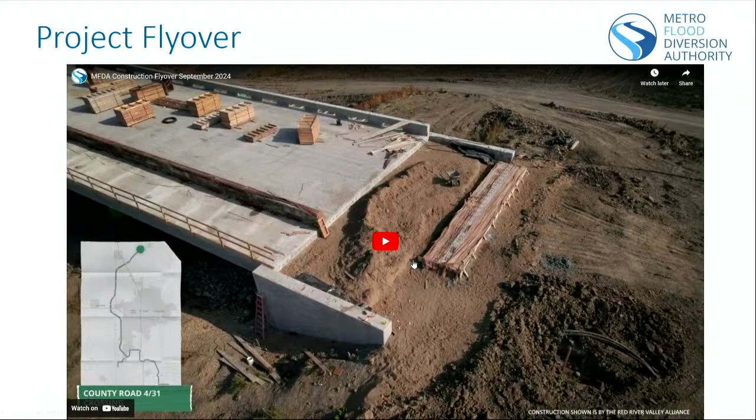One of the items we do on a monthly basis for our board presentation is a quick drone video update that gives a few-minute overview of the highlights of construction for the last month. Mayor, I hope you don't mind, but this is actually the presentation we'll show you guys tomorrow at our board meeting, so it's hot off the presses. This will be the first viewing of our drone update for September, giving a snapshot of some of the construction that's happened in the last month.

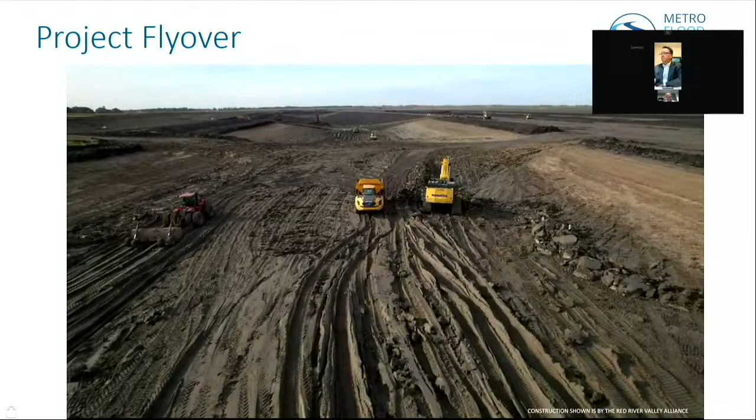Hi, I'm Tom Fuchs, the Senior Construction Manager for the Metro Flood Diversion Authority, with this month's project update. ASN Constructors' teams have continued to dig down to excavate the stormwater diversion channel while building up to construct the bridges that will cross over it.

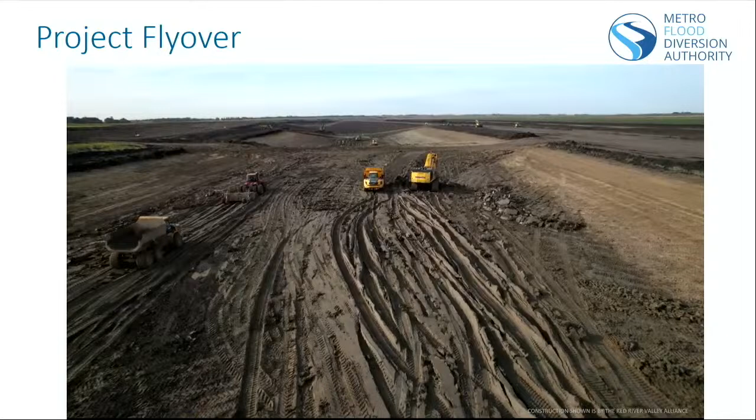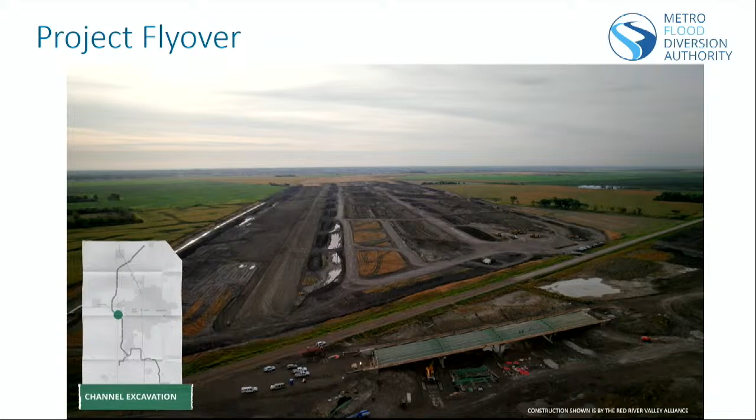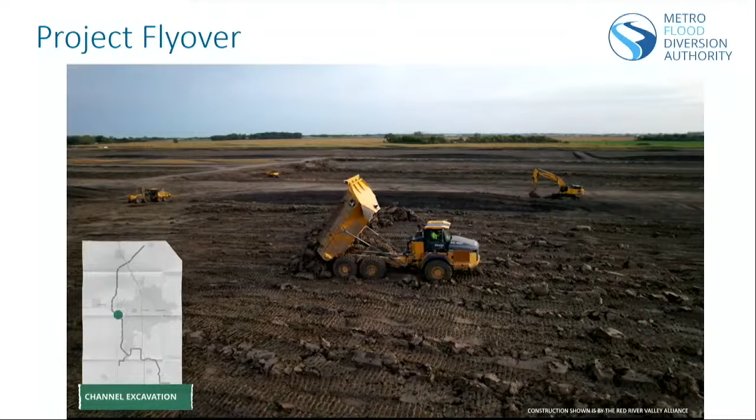In Reach 10, just south of I-94, crews are placing excavated material for the non-embedded levee, which must be constructed in warmer weather. Levee construction is also the focus in Reaches 11 and 12, further south.

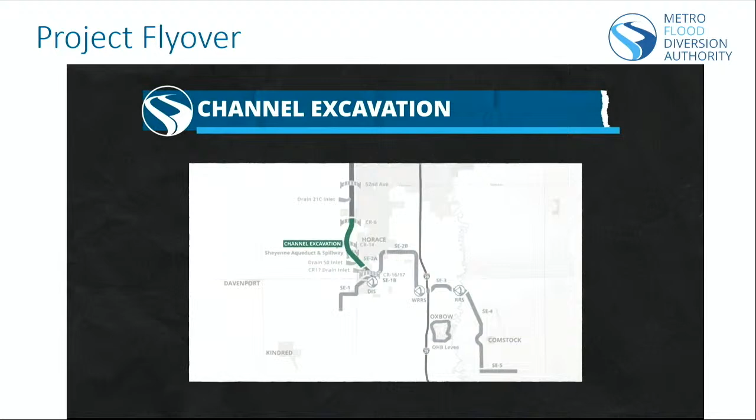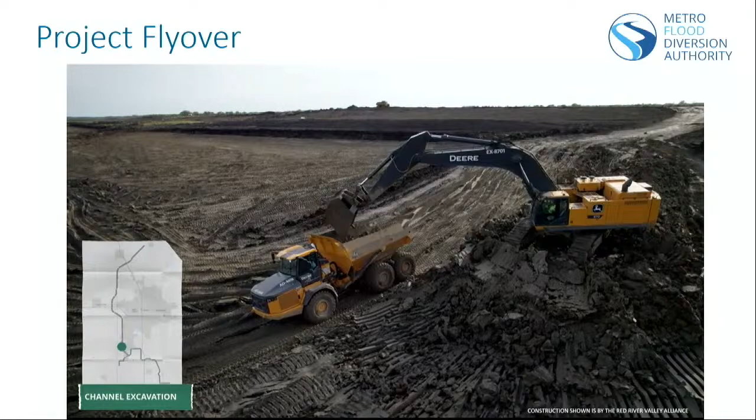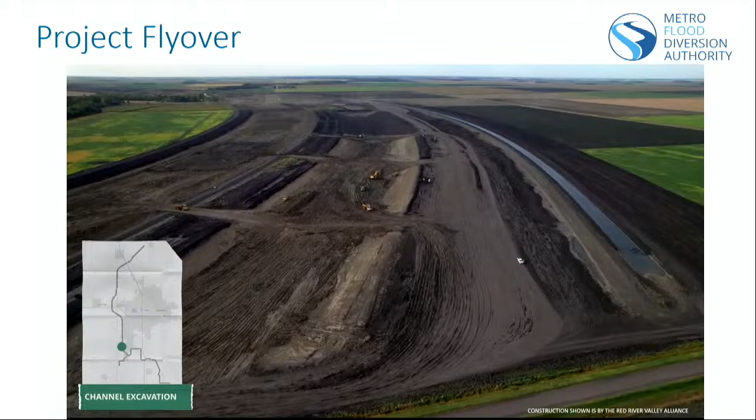In Reach 13 of the channel, south and west of Horace, North Dakota, crews are digging the main channel and placing the excavated material in berms on both sides. Close to another 2 million cubic yards of the necessary 45 million were moved in the past month, bringing channel excavation to about 57% completion.

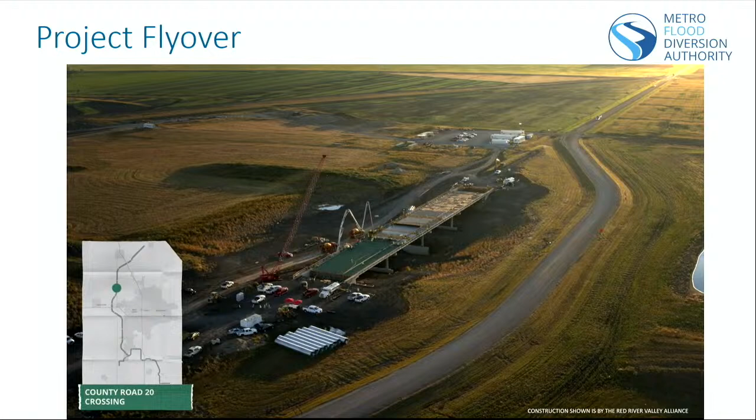Work also continues on many of the 19 channel crossings. At County Road 20, ASN Constructors started early to pour approximately 700 cubic yards of concrete needed for the bridge deck.

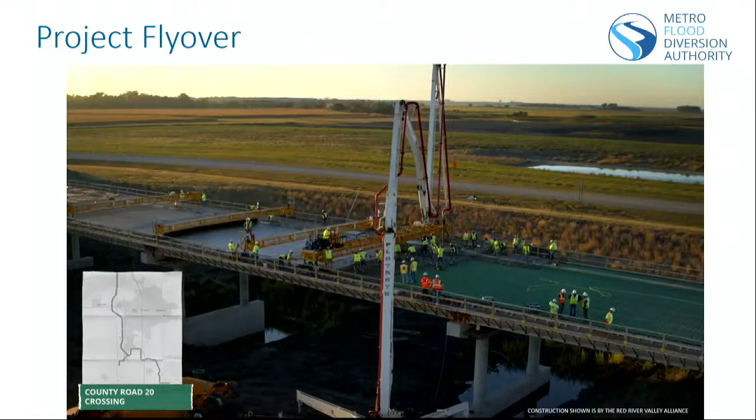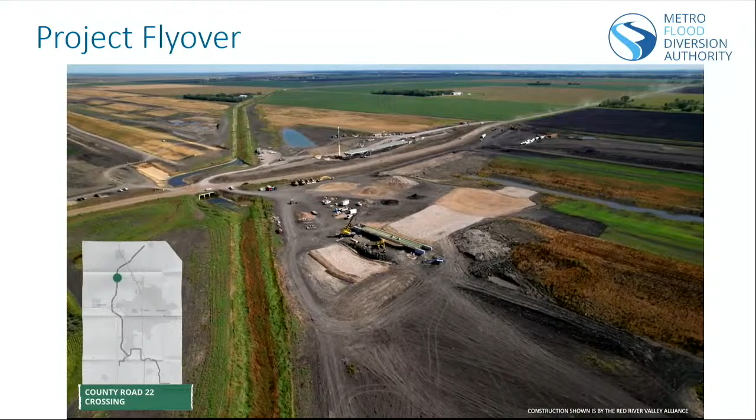North of there, at the County Road 22 crossing, bridge girders are now installed. Our drone view also captures nearby progress on the Maintenance Road Bridge crossing the lower Rush River inlet to the channel, which is one of several river and drain inlets under construction.

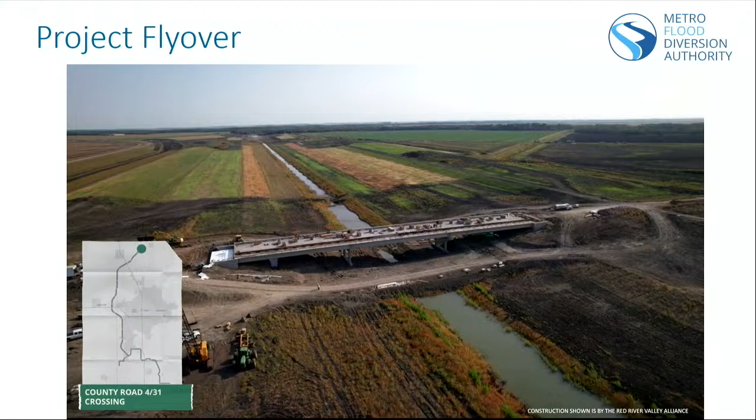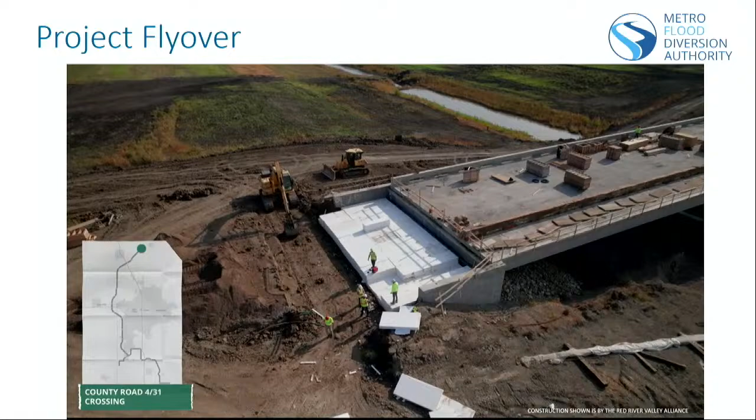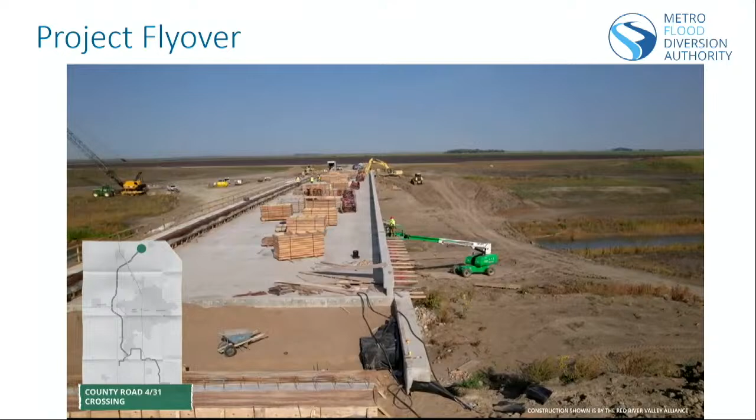Northeast of Argusville, North Dakota, near the diversion outlet, ASN Constructors is working toward completion of the combined County Road 4 and 31 crossing. Crews have now backfilled both abutments, including installing geofoam, a lightweight fill material that mitigates settlement, and they are beginning to construct the concrete approach slabs. Concrete bridge railings are also underway atop the bridge deck, which was placed last month. The new crossing is expected to open to traffic later this fall.

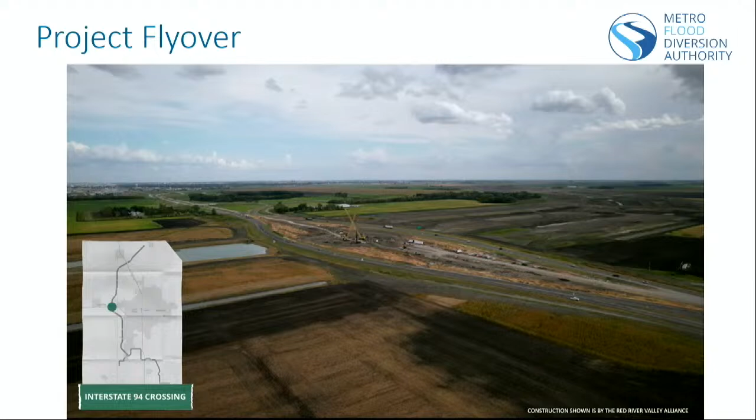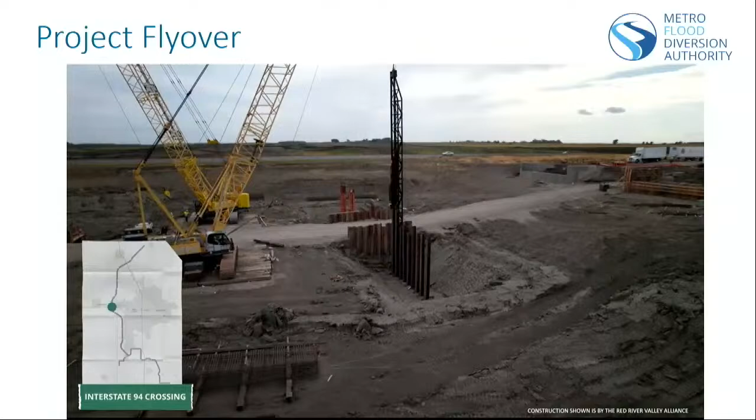West of the metro area on I-94, bypass lanes are now fully constructed and will be ready to open before winter. ASN has completed mainline pavement removal and constructed portions of the required grade raises for the new crossings. Crews also began driving H-piles as well as forming and placing concrete for the bridge's substructure elements this month.

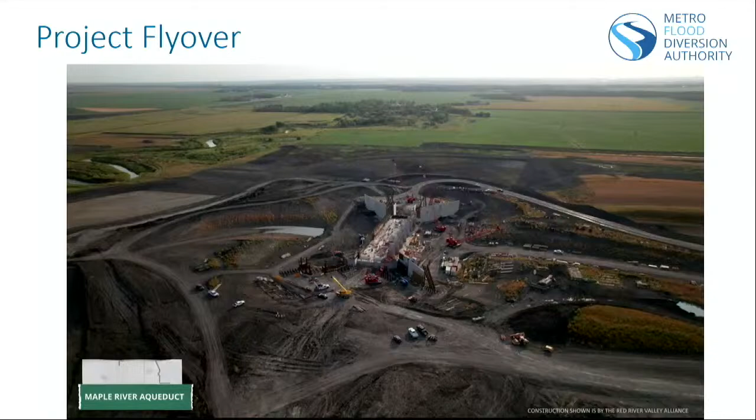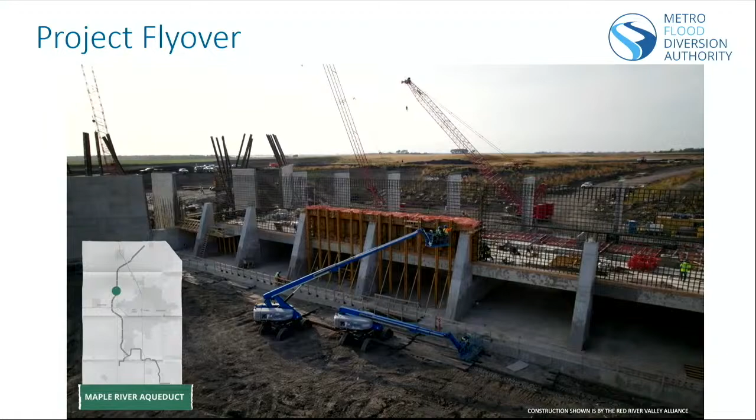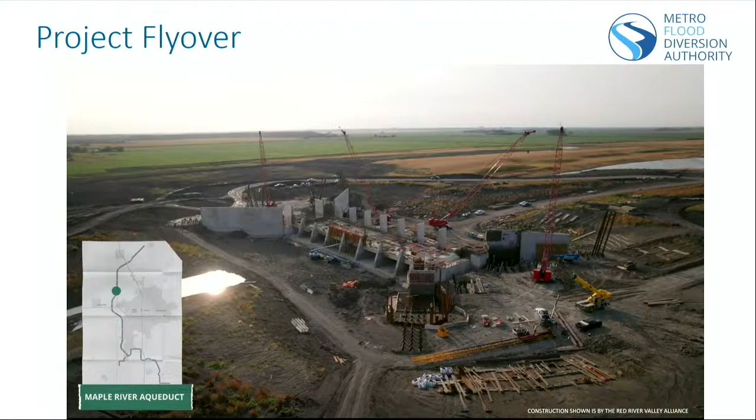Over at the Maple River Aqueduct, where the river, rather than cars, will cross over the channel, ASN has continued constructing segments of the concrete flume base and has begun formwork and concrete placement for the first portion of the north flume wall. H-pile installation and concrete work has continued at the adjacent wing walls surrounding the flume and conduit structure as well. To date, about 9,500 cubic yards of concrete have been placed at the aqueduct.

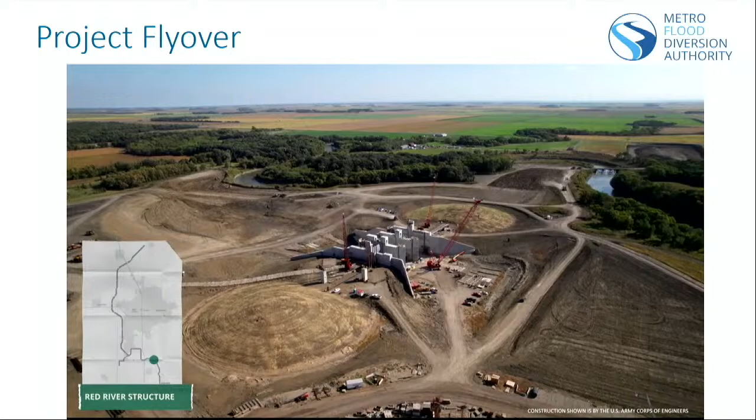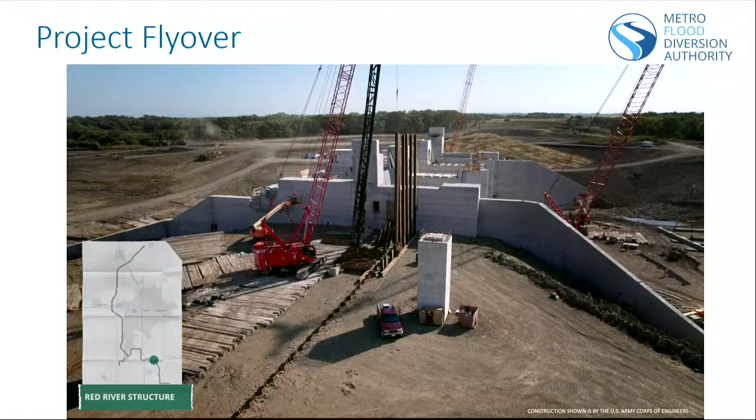At the Red River structure, Ames Construction is nearing completion of concrete work for the control structure. The U.S. Army Corps of Engineers contractor also began driving sheet piles and H-piles as well as placing concrete at the flood walls east and west of the structure.

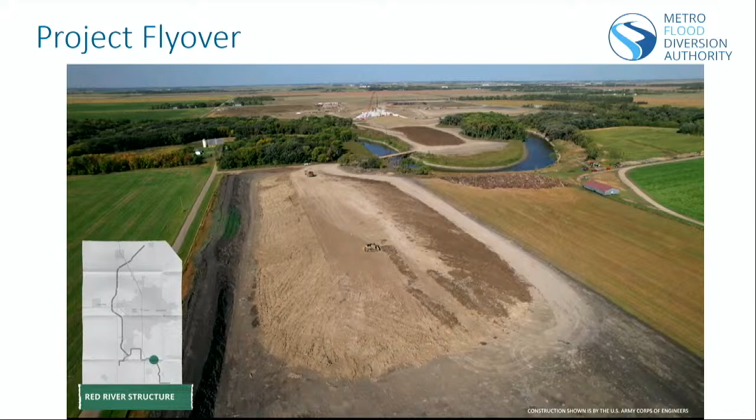Crews also began excavating and stockpiling roughly 460,000 cubic yards of impervious fill east of the Red River on the Minnesota side of the project. This material, enough to fill the U.S. Capitol dome more than 9 times, will be used to construct the embankment that will cross the Red River after the river is permanently diverted through the structure in 2025.

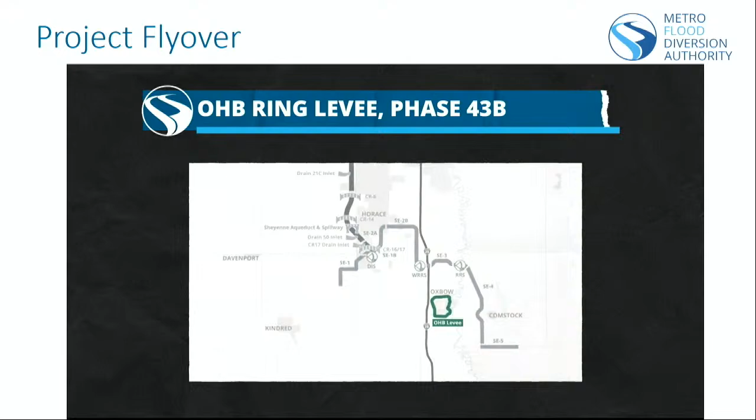A Corps contractor has also been working on the Oxbow-Hickson-Bakke ring levee. Hendrickson Transportation has completed more than a mile of the inspection trench. They've also completed about 3,000 feet of the 11,500-foot-long embankment using excavated material from the North Borrow Pond, one of 2 ponds that will be constructed as part of the project.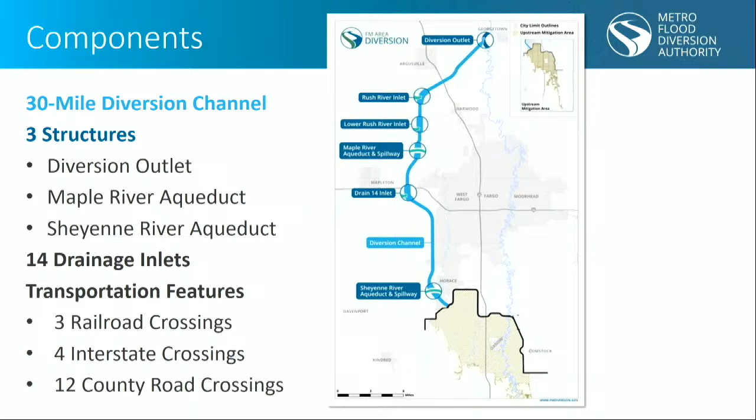You saw a lot of things, Governor. I'm glad you got a chance to look at the very downstream end of the channel, because with 30 miles of construction right now, it's kind of tough to get everywhere in one quick trip. So we won't get all the way to the outlet today, but glad you got a chance to look at that. Again, we're making good progress on all of these features.

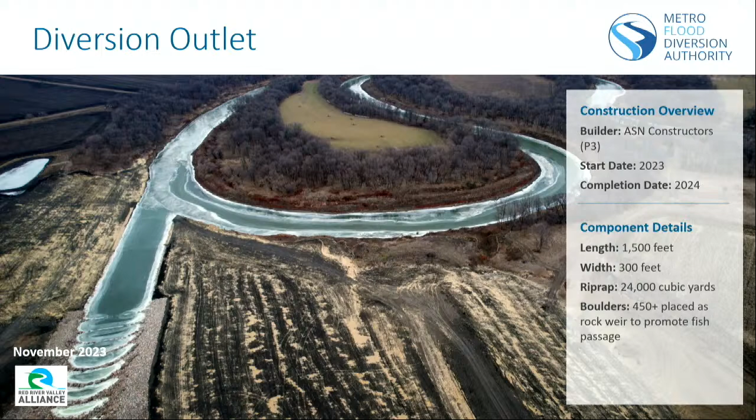This is a view from last fall, early winter, of the diversion outlet. We do have the outlet connected to the Red River, so the first couple miles of channel are functional. Once we get the 431 bridge open, we'll be able to open up the channel back to the interstate, BNSF and County Road 81 crossings as well, which will likely happen yet this fall.

So kind of a quick overview of what the main channel looks like. You saw quite a few views of this. This is a similar view to what you probably saw in the 431 video. You can see the gray on the outsides - that's the extra material from excavating the channel, just being stockpiled adjacent to the channel for long-term storage. And then you look at the green areas, the main body of the channel, a small levee on the right side of the screen that's partially embedded right into the material piles.

Again, for the first several miles of the channel, we have a sinuous low flow channel to replicate fish passage. Since we are dumping the lower Rush and Rush rivers directly into the diversion channel, we do have fish passage up through the Rush River and a structure being constructed on the Rush River to allow fish to climb back out into the main body of the Rush River as well.

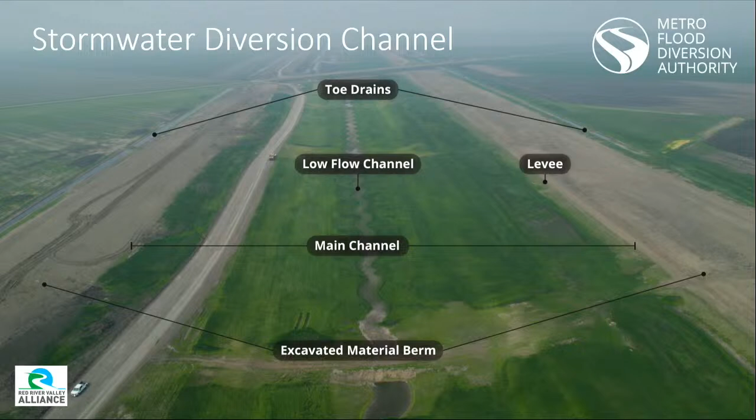So at the aqueduct, we will get a chance to see this today. The Maple Aqueduct is making good progress. As you saw in the drone video, they're starting to form and pour some of the walls of the flume to carry the Maple River across the diversion channel. This has been under construction since early '23, and plans to be completed here in the fall of '25. Just a quick overview - this will be a rendering of what the finished structure would look like. So from bottom to top of the screen, that would be the river crossing our diversion channel.

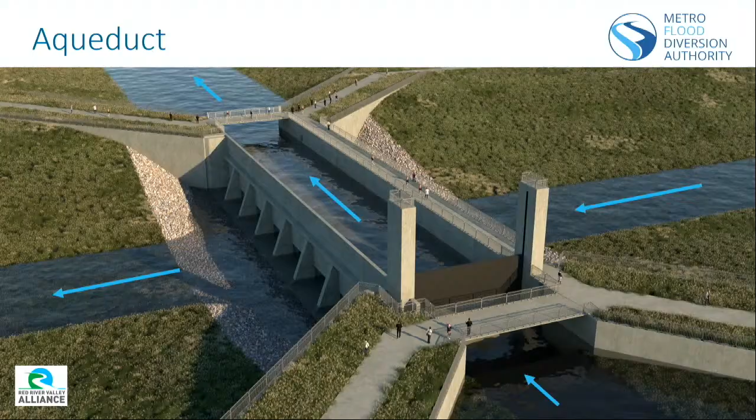And then from right to left on the screen would be the diversion channel, flowing underneath that structure to carry floodwaters around the metro. A quick schematic, kind of a busy drawing, but just to give you a spatial view, what you were just looking at is the aqueduct flume, and that's where the river will cross the channel.

There's also a secondary spillway that'll be constructed off of the channel and into the diversion channel. So large flows coming down the Maple will be spilled directly into the diversion channel, again to provide reliable flood protection inside the protected area from the red and wild rice flooding on the channel, but also to avoid flooding along the Maple River being brought into town.

The natural channel right now flows just north of the site. You'll be able to see some trees along that today, and that'll just be connected through the aqueduct structure, similar to the other large structures on our project.

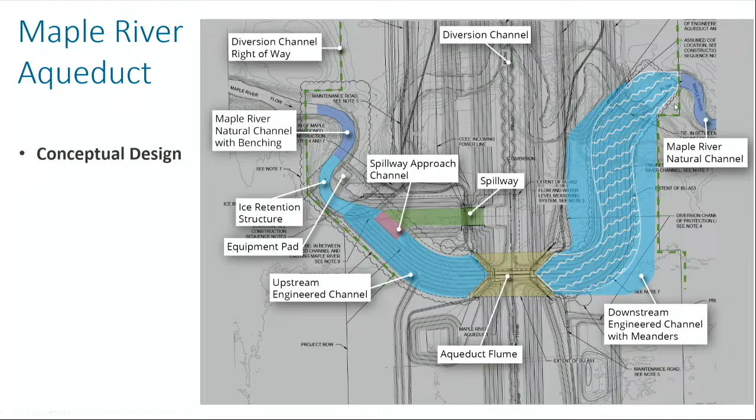So real quick, we're making probably the most progress on bridges this year. Our mild winter really helped advance that construction in a large way. So Governor, if you can order another winter like last year, that'd be really good for our construction. We've got bridges in all states of construction generally from north to south.

As far as advancement, the top left pictures, the County Road 431 bridge that Tom talked about in our video. That bridge will likely be completed yet this fall, along with maybe one or two others, depending on how the fall weather goes as far as getting roads open. Current schedule would be to have all of the bridges open next summer and fall, so we'll have transportation reconnected, and then they can continue excavating the channel through those structures.

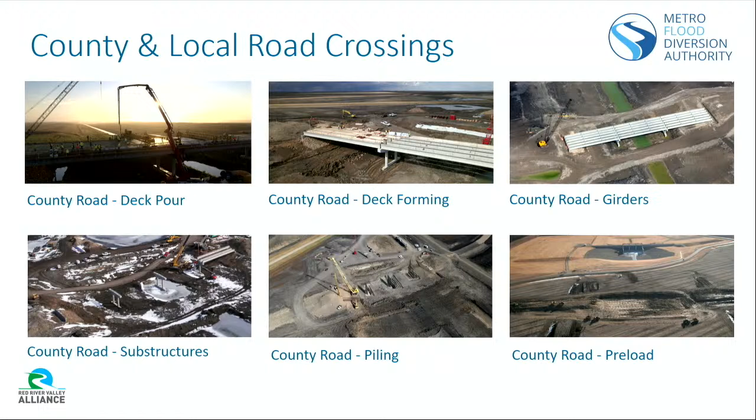And then on the south end, they're working on piling and preloads on bridges on the south end of the channel right now, again advancing those pretty continually from north to south.

Good progress being made also on the interstate and railroad crossings. Interstate 29, you saw in the drone video, they've got girders set and are starting to work on decking on the first of the two bridges on I-29. Again, working on the substructures on the I-94 bridge. We'll be setting girders on the first BNSF bridge here probably in the next few weeks, maybe 4 to 6 weeks, on the Prosper Bridge, and then are also working on substructures on the Hillsboro crossing and working on embankment and grade raise for the KO crossing north of 94.

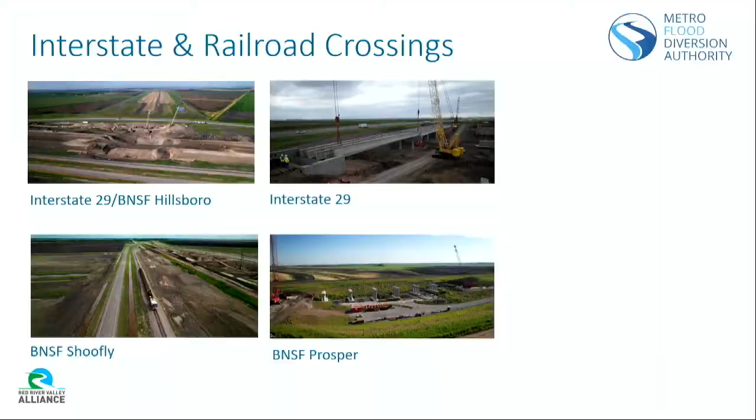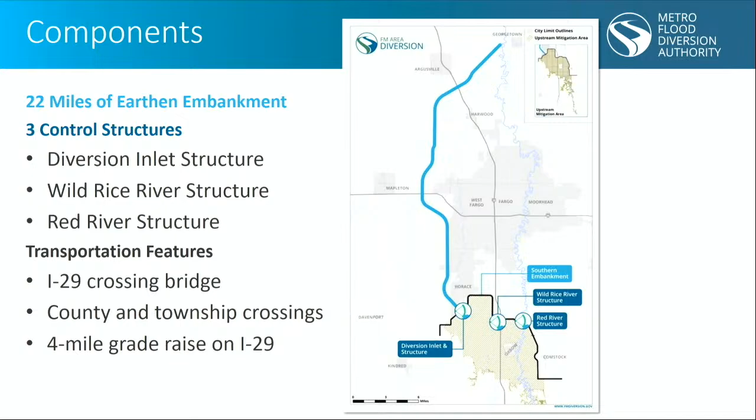So a real quick rundown on where we are with the southern embankment. Again, this is the piece of the project being constructed using federal dollars by the U.S. Army Corps of Engineers. We have the three main control structures: the diversion inlet, the Red River structure, and the Wild Rice structure, along with about 22 miles of earth embankment to protect the metro area from water coming from the south. We'll stop at the diversion inlet structure site today.

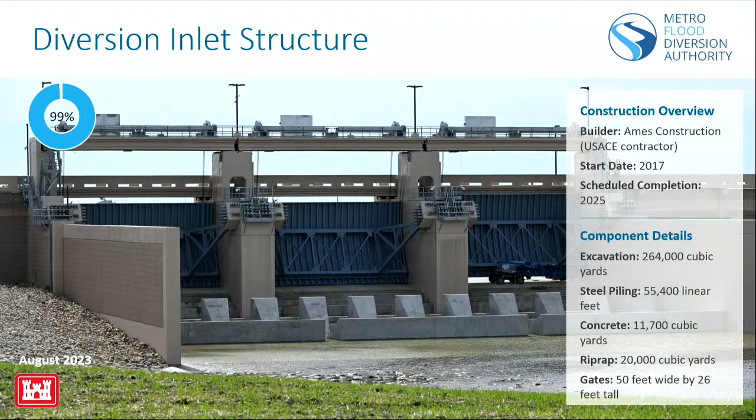This structure is virtually complete. They're waiting on some final gate equipment that we anticipate will be in and installed, along with the monitoring equipment for the USGS gauges. That should all be in place sometime mid next year. But when we stop there today, there's no active construction. They're just waiting on that equipment, and all the safety rails and everything's in place. So it looks like a very, very completed site, which it is, and it's kind of nice to see a structure that's virtually done on the project.

The Wild Rice River structure is nearing that same point. They're working right now on the final pieces of catwalks and scaffolding and walkways, finishing up the bridge deck and the access roads. That will be virtually complete here this fall, with the same schedule that by next spring they'll have that final gate equipment and USGS gauging station information and equipment installed as well.

We're not going to be able to stop at that site today. The access road is a little bit suspect, so we just haven't been taking buses in there yet as far as access. Then the Red River.

Chris, can you go back one on the wild rice? I think if I remember in a couple of the big floods that we had, multiple ones, but on one of those, I think when we were at 29 CFS, 29,000, almost half of that was coming down the wild rice, not the red. So just go a little deeper on this structure. Sure.

Floods may materialize in different ways, so we won't always have that 50-50 split between the wild rice and the red. Let's talk more about how this works, what the capacity is, and how we're feeling about the design of this piece.

Thanks, Governor Brigham. The structures are set up generally with about a 60-40 to 70-30 split, with the majority of water coming from the red side. We have a lot of redundancy in our gates from a Corps design standpoint. They have to design for probable maximum flood, similar to how other earthen flood storage dams are designed for a very severe event.

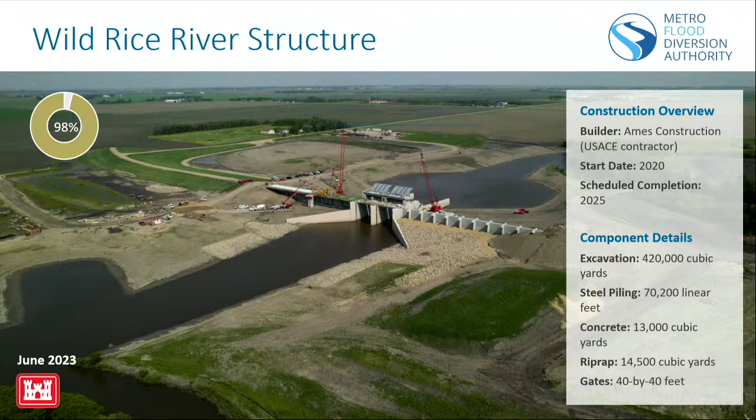So we'll swing through today, and if we can squeeze enough time out of the trip, we'll take a quick look at the Red River structure. Again, this is about 60% complete.

As you can see in this picture, one of the gates is in place and hung, and they're working on assembling the second gate—a lot of great work going on here. This structure is one of our critical pieces to get done, so the Corps is monitoring their schedule on it very closely, as it bumps right up against our completion date for the ultimate opening of the project to make it operational.

The gates here, just to give you a quick rundown and get into some nerd stats: there are 3 gates, each 50 feet wide and a little over 50 feet tall. They weigh a little under 200,000 pounds each, so they're incredibly large gates.

Obviously around here we don't produce a lot of those, so there aren't any manufacturing facilities close by. They're making those down south and shipping them up in pieces. You can see the orangish strips on the gate where they welded it together in the field. They have a cribbing system where they put the gates together, weld it in place, and then touch up and finalize the painting on site.

It's quite a unique system. Down in the southern parts of the country they just put them on a barge and float them into place, since most of these are on active rivers out in the middle of the country. They're using some pretty unique methods to get the gates shipped here, assembled on site, and set into place. It's quite a process to watch.

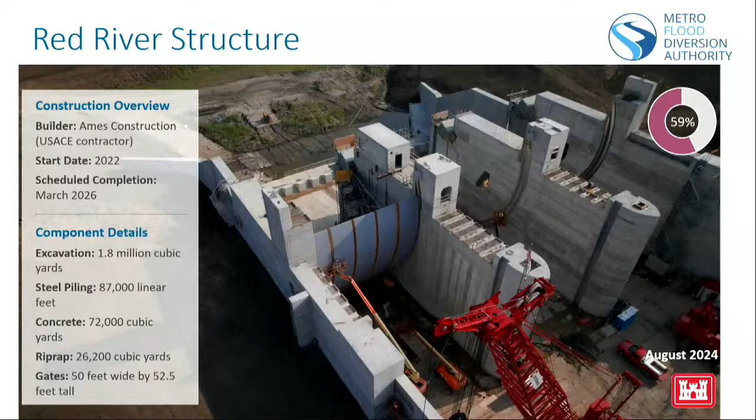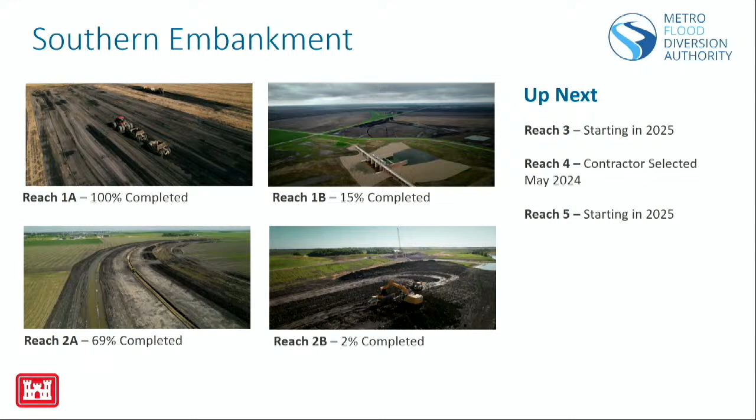Real quick, there's several reaches of the southern embankment that are underway, and the last couple of reaches right now are in final design. I'll talk a little bit about that on the last slide, just to wrap up where we're headed in the next couple of years for the project.

Again, one of the main projects we did, which is virtually complete with just final punch list remaining, is the grade raise on I-29. Those 2 structures, Governor, are where the interior channel crosses underneath the interstate structures to let water pass between the interstate grade raise. We raised about 4 miles of interstate to make sure that as we operate the project, the interstate stays in operation south of Fargo.

That project is completely open, the interstate's back under normal operations. We're just finalizing the final punch list and a couple of warranty items we're cleaning up, and that should be wrapped up here this fall.

So real quick, I want to hit on, obviously, on a project this... One other random question, but sure.

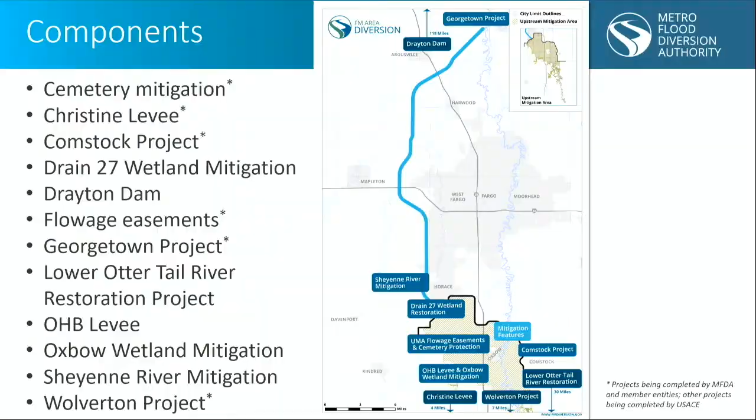I know we crossed the interstate, like in your previous picture, also with the Sheyenne diversion. Is there, at a peak event, what would the role of the Sheyenne diversion be now that it's entirely inside this diversion? Is it still operational in any way as part of an operational plan, or would flows never be high enough that it would kick out, or is the Sheyenne so narrow through West Fargo that it would still kick in with the flows being admitted on the Sheyenne?

Yeah, there will still be a flow split at both Horace and at West Fargo where some water will flow through the Sheyenne and Horace diversion channels, though it won't be used as often or to the same magnitude. We're taking those peak flows from 4,000 to 5,000 CFS down to about 1,500. That reduction is still a little more than the natural channel will handle, so we still will deflect some flows into those channels, just much less than would happen today naturally.

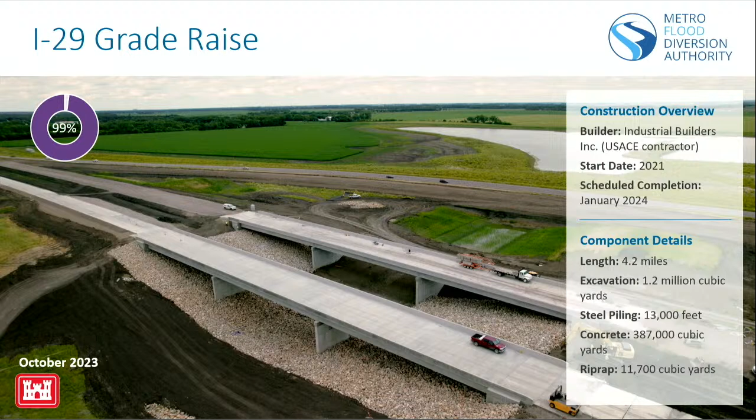So obviously a project this big has quite a few mitigation projects. I just want to highlight a couple of things we've completed to show that we are doing our mitigation as we're also doing our other construction.

We've got a couple of wetland mitigation projects completed. One is that we've restored an oxbow that was part of the city of Oxbow, creating a wetland complex there. In the more topsoil areas you see in this picture, areas were also reforested to reestablish the river riparian area.

Another one of the reasons some of our Corps counterparts aren't here. Can you go back on that one? Would that be, the way we're looking at it, part of where some of the houses were bought out? Yes, and part of the original golf course.

Where the houses are now, there's a levee there? Yep. This right here is now the levee. The piece of the levee is built right into the edge of the golf course that protects the new part of Oxbow. So yes, this was part of both our houses and where the golf course was. I bet they found thousands of golf balls out there when they were excavating this — you could see little white dots everywhere when they were reestablishing this grade. So yeah, you're looking at that exactly right, Governor.

And then the lower left is Minnesota? Yes. Well, this right here is still North Dakota, this is just an oxbow. The river actually sits just off the screen behind us. Okay, yep.

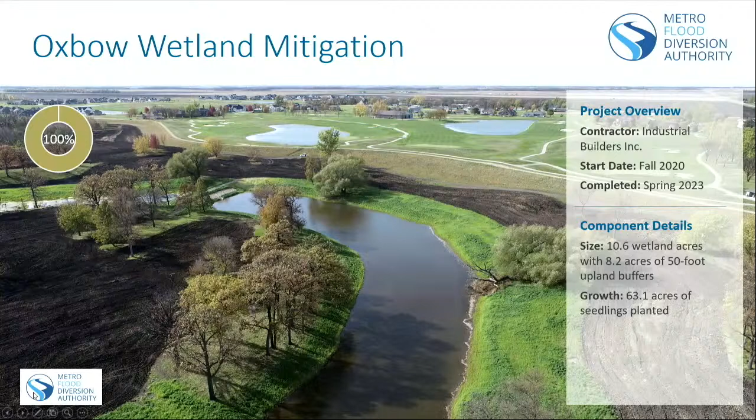One of the reasons our Corps partners aren't here today is they are doing a groundbreaking and opening ceremony for the Drayton Dam project. Most here have probably heard my spiel on this, so I won't go too in depth, but one of the mitigation projects we were asked to complete was to replace the last remaining low-head dam that hadn't been converted to rock riffles on the Red River system, here at Drayton. We were asked as part of our mitigation for operation of the gates on the Red and Wild Rice River to complete that project. Corps of Engineers took that on, did a really nice job. That project was virtually completed last fall, and they just were doing final cleanup and some tree plantings this spring and summer. So they're doing a groundbreaking and ribbon cutting ceremony up there, probably happening here in the next 15, 20 minutes.

Our state engineer is up there today. John's up there. I recall this is one of the criteria that the state of Minnesota put on their approval, a contingent thing. So for the legislators that weren't part of those negotiations all the way up at Drayton, Minnesota said you don't get a permit unless you do this that far downstream.

I'll stop short of any editorial, but there's a lot of excitement around this from the resource agency side. I've already gotten reports of finding fish that were tagged that have been traversing all the way from Lake Winnipeg through to the headwaters of the Red River south of Fargo here. So I think there's good evidence that fish are moving. Not all of them move that far, but there is evidence that the fish that are tagged in the river are migrating quite a long distance and utilizing these structures to make their way to live their life and do their business.

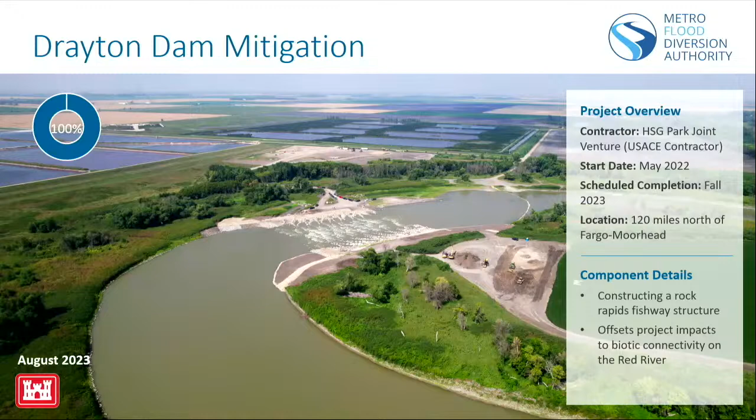Real quick on property acquisition, Mayor hit on most of this as he was kicking off the meeting, and there's probably a few updates to this. I didn't grab from the new board packet for this month, but we're virtually complete with construction footprint purchases. A couple of final eminent domain cases are moving their way through the court side of things, so we don't show those as complete yet. And then we're making good progress, a little over half done with acquiring the easements in the upstream storage area as well. So making nice progress on all of our land acquisitions for the project.

And with that, I want to wrap up and talk through a little bit. For a reminder on the easements, they get to keep the land. We pay them an initial easement access payment. And then if there's a flood event, is there an additional payment?

No, there's not. We've got a few programs that we're putting in place. So yes, we're making an initial easement payment to purchase the property rights for both storing water and for removing development rights from the land. And then from an ongoing perspective, we're putting in play 2 crop insurance programs to help reduce the producer's risk from an operational event. In addition, we have our debris cleanup and restoration projects that we would do following an event. So no direct payments to landowners, possibly some reimbursements if they do some of their own cleanup, but no direct payments for storage of water. That's purchased up front, but if there were crop damage, then that's part of the insurance program.

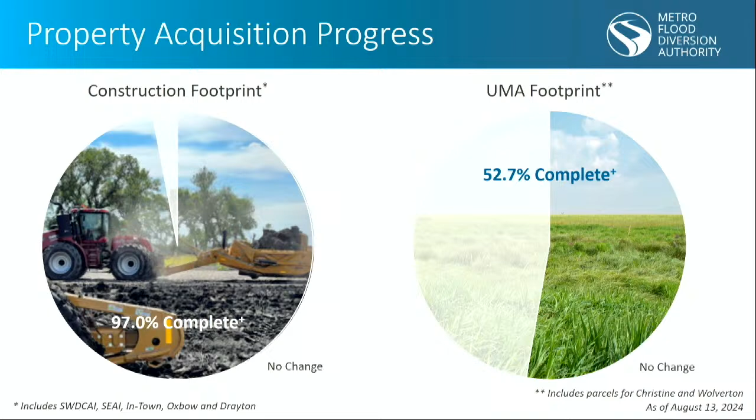Question, you're right. I remember in the Senate Ag Committee one of the questions that came up was weed control and who's responsible for that. Because people are going to be building their budgets, and if it's a political subdivision versus the owner or tenant along there, because there's a lot of ag people worried about thistles and all sorts of invasive species being transported north from land that's not theirs. So how does that work in terms of the responsibility of weed control?

Are you asking just on the general cropland or on the project footprint land or both? On the easement type, where right along the diversion. I'm not aware that there's any separate payments for weed control. I think that just stays with the producers to manage the weeds on the land.

So real quick to wrap up, just want to talk a little bit about where we're headed next. This is another graphic that we use month by month to track progress that we share with our board. If you can see the colors, it's a tough map to put on a PowerPoint because it's oriented north and south, and I can't stand looking at graphics sideways. So bear with the format.

But we are tracking progress. So you see everything that's in the tan color is under construction. So we are down to just having three segments of the core program that aren't under construction. And then we also are tracking completion, both from a functionally complete and an overall complete. And we've got 2 segments that you can see up on the north end where we've got the diversion outlet, a couple of channel reaches, and a drain inlet that are functionally complete. They're working on seeding for those now.

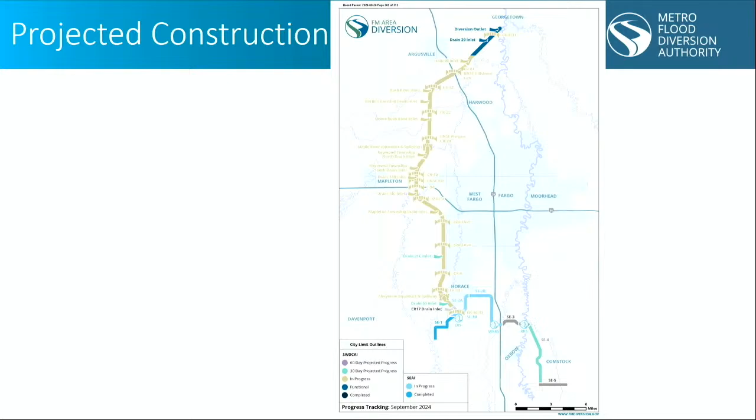So with that, that's all I had today, Governor. If there's other questions folks have, otherwise we can certainly cover some of those as we're driving through the project sites as well. I hate to even think about this, but this is sort of the plan for the unthinkable. But if we were to have a large flood event in 25 or 26, some of this functionally completed work might be helpful. But have we done any scenario planning for where we might be, say, next year in terms of if we had an event, where we would be in trouble and where we would have some help from this work?

We've looked at that a little bit, Governor, but without everything being completed, and especially without access to the channel, there's a limited amount of benefit we can get out of some of the features we're building.

I think one of the biggest benefits we have is that we're almost 90% complete with all of our in-town work to protect the in-town area to that 37-foot stage, which gets protected practically up into the low 40s with very minimal sandbagging anymore. So we could certainly fight a flood event similar to what we had in 2009, or in that range, in a much more manageable fashion today by having that work done. That was a lot of our objective in advancing that work early and getting the in-town parts protected, so we could fight those moderate-sized floods while we were working on getting the overall project completed.